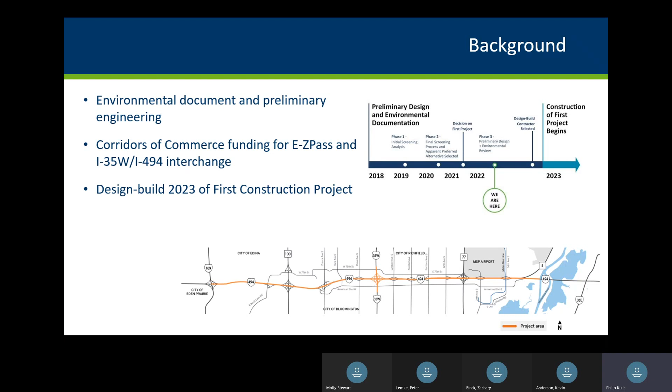All right, so project goals. The first one is reduce traffic congestion. As I mentioned, there's a lot of traffic congestion out there, even during COVID and on weekends. There's continual congestion both on 494 as well as I-35W as you approach 494. So some of the alternatives are looking to address those specific areas.

Provide transit advantage. There is transit along the corridor that operates both on 494 and across the corridor. Safety is also a key metric. When we look at the crash data, a lot of crashes have occurred over the past 10 years or so, and a lot of that is congestion related. So they kind of go hand in hand. We'll be looking at improving safety and operations concurrently.

Then the next one here is improving connectivity of pedestrians and bikes across 494. Obviously everyone knows with interstate, sometimes there's some barriers there, and really trying to reconnect some of the communities that are there. So there's crossings of 494 today, and we're looking at improving those crossings for pedestrians and bikes, widening out those bridges to provide ped facilities, as well as implementing a secondary pedestrian crossing - a ped-only bridge in addition to the one that's out there today.

And then updating infrastructure. A lot of the bridges that are out there have been in place since the interstate was built back in the 60s, so there's really a lot of room for improvement out there. A lot of the infrastructure needs maintenance, so being able to tackle both the congestion and asset management pieces are being combined here. And then also a big part of the project is drainage.

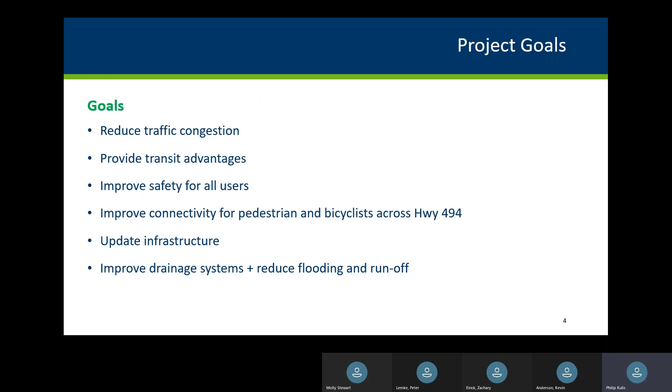So as I mentioned, I'm going to focus a bit more on the traffic aspects of the project, since that was more of my role here. Over the 4 years, we've done a lot of traffic work, including looking at mainline alternatives - really, what's the right cross section of 494 with regards to the number of lanes, as well as how are those lanes designated. Are they managed? Are they HOV lanes? Are they buffer lanes? So there's a lot of mainline alternatives looked at to try to help alleviate congestion.

There was also a lot of alternatives looked at for I-35W and 494. Fewer alternatives, though, there, I would say, than the mainline, and that's because of the work that was done roughly 10 or so years ago by SEH. They did a lot of looking at that interchange and coming up with recommendations. So we really ran with a lot of the recommendations that were provided and just fine-tuned them for this project.

Access reconfiguration and interchange type. The area between I-35W and Highway 77, there's a lot of access in that 1.5 mile span. Typically on a freeway system, you're more in the area of an access point every mile or so. And in that span, there's Lyndale, there's Nicollet, there's Portland, there's 12th. So there's a lot of access there. We're looking at reconfiguring that access to help with access spacing and improve safety and operations with that.

And then some of the more recent work we've been working on as we've transitioned from figuring out what the alternatives will be and what's getting implemented is the transportation management plan - how traffic will be managed during construction, the overhead signing and ITS infrastructure. That's actually a pretty interesting topic just due to how dense the corridor is for signs. It's really a challenge to get all the signs in that are needed out there with all the land uses and all the access.

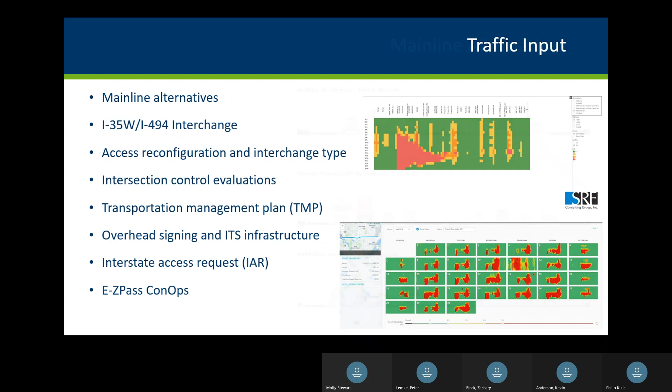So jumping in here, first we have the mainline alternatives. There were two different screening levels that were looked at, with a lot of different screening criteria. Traffic had several elements, but there were also elements such as environmental justice and land use. There was a lot of variables that went into play here.

The alternatives looked at would be adding a general purpose lane, or adding HOV lanes or managed lanes, so E-ZPass, formerly known as MnPASS. Those would be lane adds, not lane conversions. I know with some of those managed corridors they're looking at just converting a lane, but for this project it was assumed all these would be lane additions.

There was also a look at buffered and separated lanes. Like 394, where that's a separated lane going into and out of downtown, that was looked at, providing more of a separated facility that could account for all the through trips on the corridor that are just going straight through. There were two versions of that, a buffer and a barrier, so different levels of that and different right-of-way impacts.

Ultimately, it came down to more of the general purpose or managed lane, and in the end an E-ZPass lane is being implemented out there in both directions. Here in a few slides, I'll talk about the limits of that and what's actually being constructed with the first project.

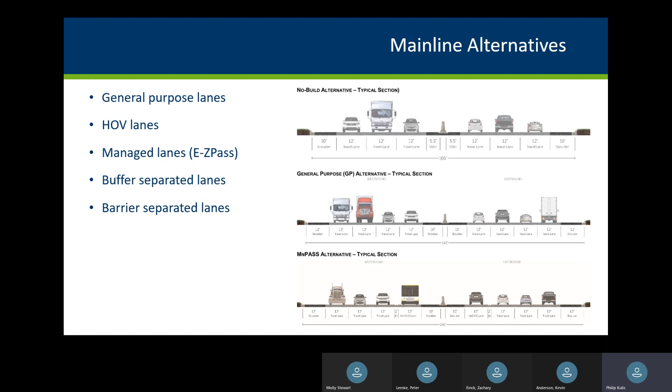Next up, I have the I-35W and I-494 interchange. As I mentioned, there's heavy congestion at this interchange, particularly in the northbound to westbound direction, with vehicles coming up northbound I-35W and going westbound on 494. It's one of the busiest and most congested interchanges in the state, and it's in the top 100 across the nation on INRIX's list of interchanges, so we're looking at improving that.

The interchange alternatives looked at here were the turbine interchange, with a couple different levels of it: there's the one loop on the left, and then the three loops, referring to the amount of cloverleaves remaining there. This was looked at more during the previous study I mentioned, and what was carried forward into this study was the three-loop one on the right-hand side. A lot of that was related to benefit cost, since those other loops weren't necessarily as heavy movements, and the cost to implement the full turbine interchange is definitely a lot higher compared to the partial one moving forward here.

As part of this project, we were looking at how the interchange provides access to 82nd, a city street in Bloomington, and whether or not access is being provided to that. We looked at a couple different ways that could be provided, and what it would mean if it wasn't, since traffic would have to reroute, causing impacts. There's definitely cost to weaving some of those ramps together and bridging them, but ultimately it's recommended that access is provided to 82nd, so that will be completed, and we are moving forward with alternative A, which provides access.

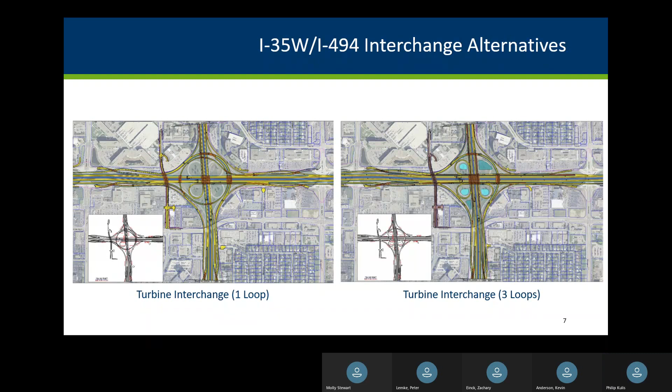The next big piece of the alternative evaluation is the access reconfiguration between I-35W and Highway 77. As mentioned, it's a pretty dense area with Lyndale having full access, and then Nicollet, Portland, and 12th, which have short weaving distances and short acceleration lanes. So we're looking at alternatives that consolidate that access down to Portland. Lyndale will remain in place, and Nicollet and 12th will ultimately be closed and will not have access to 494, but access across 494 will remain, so those bridges will be reconstructed and drivers will be able to cross from Bloomington into Richfield.

Once it was determined that access would be at Portland, various interchange alternatives were looked at. SPUI was looked at, and there's already quite a few SPUIs out there, like at Penn and at Lyndale. So we looked at SPUI, Tight Diamond, and then Texas U-turn, an interchange that's common down in Texas but not as common up here. That was actually looked at quite heavily as part of this project, where coming off the ramps you can make the U-turn without actually going onto the main route of Portland. That was looked at quite heavily and advanced pretty far through the evaluation process.

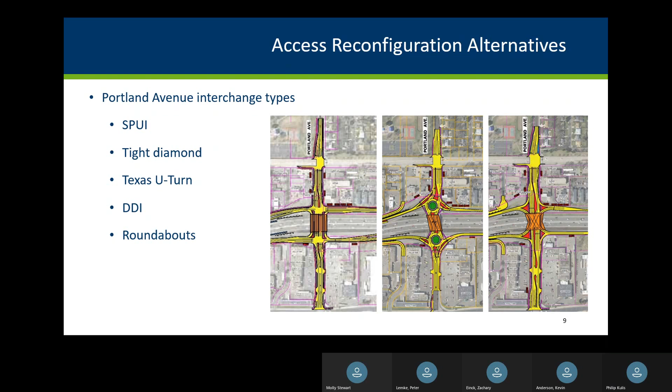All right, so after all the alternatives were evaluated, here's the recommendation. The long-term vision, not what's being constructed next year, is a third lane from Highway 169 to Highway 77 in both directions, so one new lane in both directions.

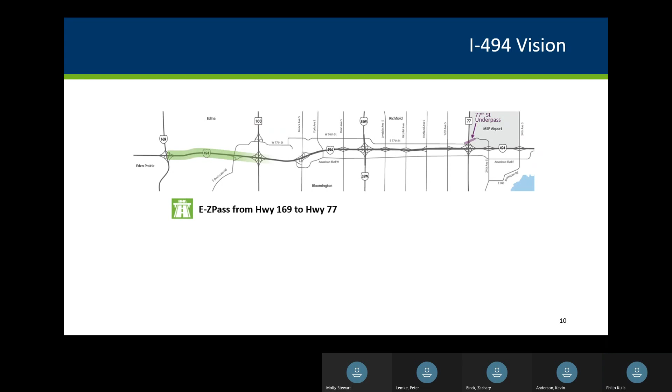The I-35W, I-494 interchange improvements include the turbine interchange, and there's also quite a few braids associated with that, eliminating some of those weaves and lengthening the distance vehicles have to merge and diverge from 494 to 35W.

And then there's the access reconfiguration between I-35W and Highway 77, consolidating that access so it will be Lyndale and Portland as full access interchanges.

With these improvements, we expect to help alleviate congestion and pull back some of the trips that have diverted off of 494 - like communities of Richfield and Bloomington particularly, a lot of traffic diverts from 494 during congestion time periods. So a lot of their facilities take diverted traffic, such as American Boulevard and 77th Street just north of there. With that, we're starting to see trips return back to 494 with the improvements.

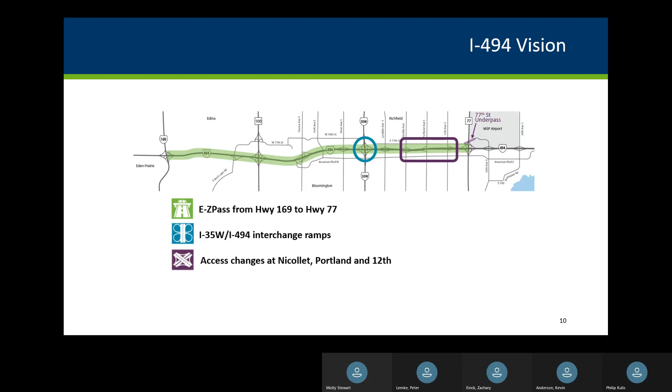As I mentioned, everything is not being constructed next year. A lot of that's due to funding limitations and also impacts due to construction. If we were constructing from Highway 169 to Highway 77, that's quite the length of a construction project, and there's already going to be construction impacts out there. If we were to go a longer stretch than what we're looking at, there'd be more impacts.

And the funding, that's definitely a limitation. Funding has been secured to complete the first construction project, which I'll talk about in a minute. But looking through the implementation plan, it was divided into 9 different elements.

You can see elements 1 and 2 on the west side - that's a third lane from Highway 169 to Highway 100. Then elements 3 and 4, that's a third lane from 100 to 35W. And then 8 and 9 is a third lane from 35W to 77.

And then there's the interchange of I-35W and 494 as an element. Interestingly, there's the railroad bridge - that's a limitation that exists out there right now. There's an existing railroad bridge over 494 that needs to be replaced in order to accommodate a third lane between I-35W and Highway 77. Right now, there's no room to add any additional lanes in that segment of 494 unless that bridge is replaced, so that also has to be replaced.

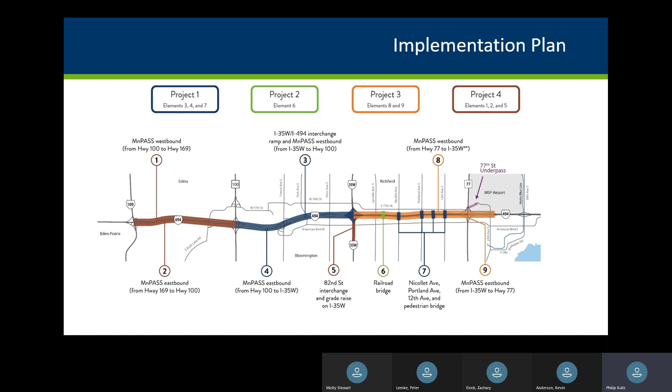So here's a cross section of what that will look like. I assume a lot of people here are familiar with driving EZ Pass lanes with a little buffer between the general purpose lanes and EZ Pass. Here's what that's going to look like from Highway 100 to 35W. There will be the general purpose lanes, and then EZ Pass, and in key areas there'll also be enforcement shoulders. That's for allowing enforcement of the EZ Pass, allowing state troopers to be out there to enforce the two-plus person requirement if they're using the EZ Pass for free without paying for it. So it is a managed lane where if you are a single occupant vehicle, you have to pay to use it.

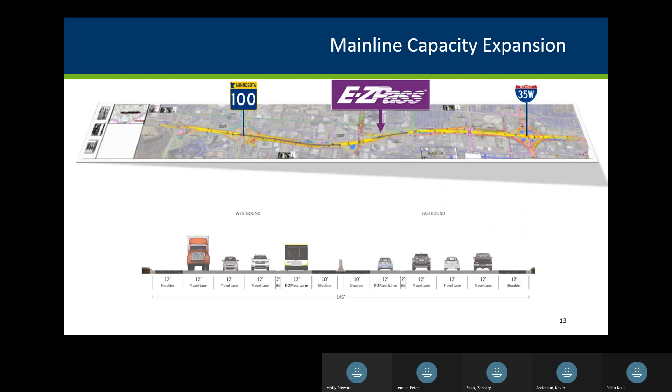With the bridge grades I just talked about, there will be traffic diversions on the local system. You will no longer be able to make some of the movements to and from Penn as well as 82nd Street. So what was defined was the box part of the project, encompassing 82nd on the south up to 76th, 77th, then Penn Avenue and Lyndale. We looked at the box and how traffic would reroute, identifying if any mitigations were needed on the local system to accommodate these traffic diversions.

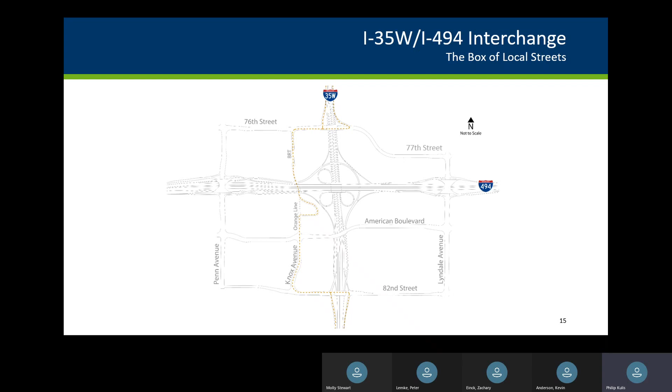Ultimately, based on the analysis, there are improvements that will be implemented at Penn and 82nd. A lot of that's to accommodate the heavy southbound left turn we're forecasting based on the access from Penn to 35W being removed. That traffic will have to reroute down to Penn and 82nd and then hop on 35W at that interchange, as well as American Boulevard and Lyndale with the traffic rerouting. Some of that's more related to the traffic diversion with the access reconfiguration, but we are seeing additional turning movements at that intersection, so improvements will be implemented with a westbound right turn lane due to that diversion.

This graphic shows what the interchange or interchanges will look like in the future as access is removed at 12th and Nicollet, and Portland becomes a full access interchange. So we'll be going from three access interchanges down to just one, as well as a new pedestrian bridge being constructed between Portland and 12th, roughly in the Chicago area. Right now there is a ped bridge west of Portland that exists and will remain in place, as well as a new ped bridge being constructed on the eastern end of the corridor at Chicago.

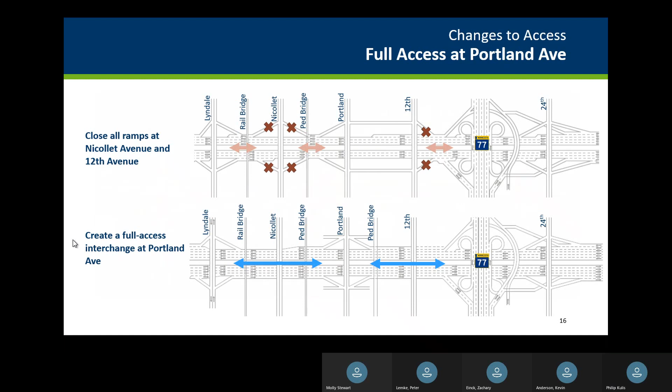Transitioning a little bit here. After we went through all the alternatives and developed what was being recommended and constructed with the first construction project, we transitioned into what that means for traffic. This project is going design build, so what we were looking at was potential construction staging. If they go design build, the contractor has flexibility to stage it as they see fit within the realms of different criteria that MnDOT is putting in place for various ramp closures that can and cannot occur at the same time. This project is a little unique, I'd say, based on the approach we're taking with the local traffic management plan. On some projects recently, it's been looked at for installing temporary mitigations at intersections and deciding those ahead of time.

With this project, there's a lot of unknowns. We're still in a time of COVID, and volumes are still different than they were before. Things are changing, as well as it being design build, so there's a couple of variables here with COVID impacting things, as well as not knowing exactly what the staging will be. It's tougher to predict what the actual construction impacts will be.

So with this, we're looking at more of a performance-based approach. The contractor will be required to monitor the local system and implement mitigations as needed based on what's actually occurring with their construction staging. It's going to take into account vehicle delays, queues, safety, crashes, and pedestrians. Really, this allows MnDOT and the agencies to respond to what's occurring based on construction, so we're not implementing mitigations that might not be needed.

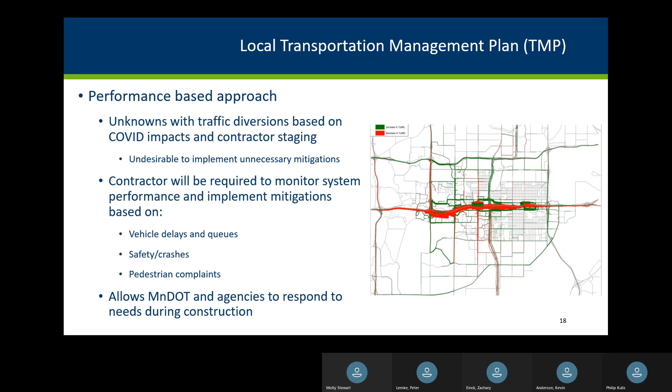As part of that, this map shows the intersections planned to be monitored, optimized, and have signal timing adjusted during construction. It's really the stretch from East Bush Lake Road over to 24th, bound by 76 on the north and American on the south, with a few outliers as we're also expecting some diversions and detour routes. So these are the 79 intersections planned to be monitored, optimized, and adjusted as part of the project during construction.

A lot of agencies are installing ATMSs out there to monitor their signals and make changes remotely. There are some signals that do not have communication, so that will be implemented with this project, so agencies can respond in real time to changes without necessarily having to go out to cabinets. They can make adjustments more on the fly.

This summer, we are collecting counts out there to be used as a baseline understanding of what's going on. This corridor hasn't really been retimed for quite a few years, and obviously there's been a lot of changes with COVID. So having a baseline of counts this summer before construction starts next year will help with that. It's a pretty interesting, unique process that's being implemented with this project that we got to develop.

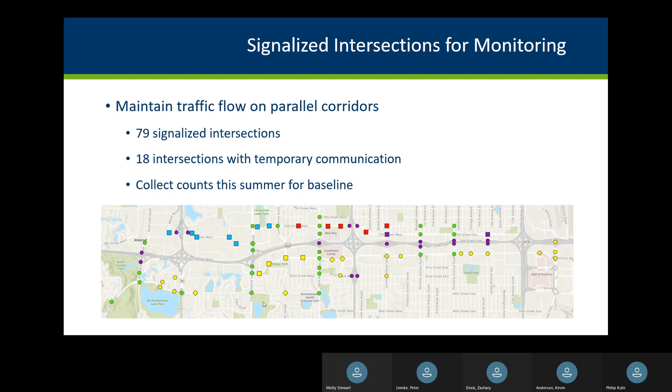Lastly, not diving into too many details here, but the overhead signing was actually a pretty critical piece of this project, and figuring out how to do it. With the access changes occurring, we're having to modify signing with the EZ Pass lanes and all the access reconfiguration. There's definitely rerouting of traffic and how they use the network, so there's accounting for local wayfinding as well as the regional system and how that works.

There was a lot of collaboration here with FHWA, MnDOT, and the MAC on the east end with the airport signing out there. There was collaboration with the MAC on their needs, both near term and in the future as they're looking to expand. There's definitely a lot of signing needs out there, and trying to meet all the guidance that exists can be a challenge, but we've developed a concept that can move forward. That was also wrapped up pretty recently as we're transitioning into the design build phase.

So with that, that's really the main pieces of the project that I wanted to cover today. I guess at this point I can turn it over to any questions, and I may or may not be able to answer depending on what it is and how that relates to the design build project.

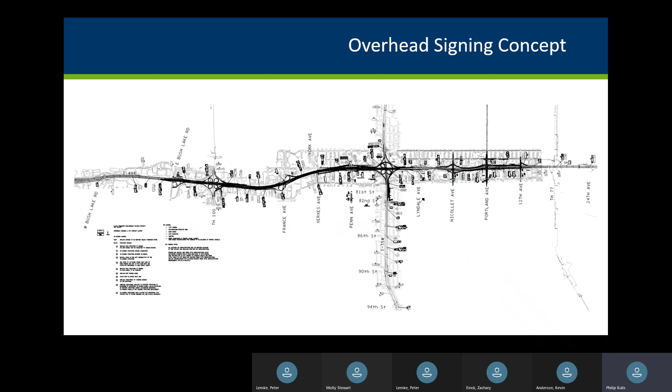Yes, the Orange Line was definitely considered, and that was actually a key part of 82nd Street too—maintaining access and how that would look during construction due to the Orange Line. The Orange Line uses 82nd, comes up Knox, and then crosses under 494 under the new tunnel that was just opened. That was considered with the design, as well as how those two interact with the Orange Line tunnel, and what the alternatives at 35W would look like given that geometry already being built and now under operation. So that was definitely considered here.

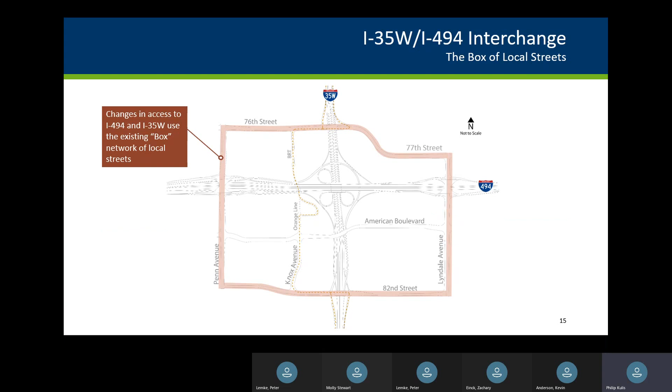Braided ramps are kind of new to me. Is that anywhere else in Minnesota, or is it going to be examples from other states? The question is about bridge braids and whether they exist in Minnesota, or if there are other examples. I want to say yes, but none are coming to mind right offhand. So if anyone else can think of bridge braids right offhand...

35, yeah, there's examples on that. With the bridge braids, it pulls this ramp over, so you eliminate the weave. That definitely helps with congestion, particularly at Penn and 35W with that short weave that existed. We didn't want to remove access there, but that short weave between 35W and Penn is definitely an issue today, and we're seeing it be more of an issue as more traffic is expected to use the corridor in the future. So those are being carried forward. This one here in the southbound direction is not being constructed with the first construction project, but all the other ones on this figure will exist when the project's complete, roughly in 2026 or so. Other questions?

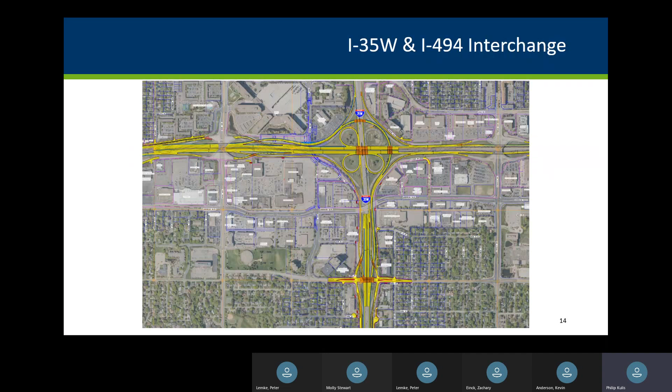Yes, good question, that definitely was a factor here and something we had to look at. Because we are going to be pushing more traffic through, that did affect the design of the EZPass and some of how we do the first construction project and tie back down to existing. With the first project here, most of it's going to be tied back down at Lyndale. Luckily, I-35W is a major generator and trip, so we are definitely seeing getting more vehicles there as a benefit to get them there faster. But as you mentioned, there will be impacts, though we're also seeing that cleaning up access between 35W and 77 definitely helps with that. So while we might be delivering more traffic, it should definitely be a more seamless flow through there.